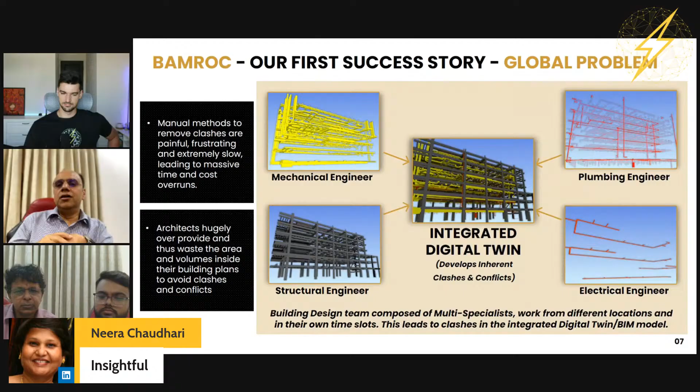Architects like me are so intimidated by this problem that we overprovide. If it's compared to a road which probably would require two lanes for the amount of traffic, just to avoid traffic jams, we provide a six lane highway. That is how we give unoptimized solutions.

So this BAMROC, the short-term solution that it gives us, removes the clashes automatically. It rides over a model with clashes. We will show that live demo. But the larger solution it will offer is that it will give architects like me the confidence to optimize the building volumes. That is the larger objective.

So moving on to the solution, BAMROC. On the left side you see a model with clashes. You run BAMROC on it, as Vimal is going to do very soon, and you have a clash-free digital twin or BIM model. We're experiencing that it's 11 times faster than current manual methods. This gives confidence to principal architects to optimize the height and volumes of buildings. Otherwise we are just over providing.

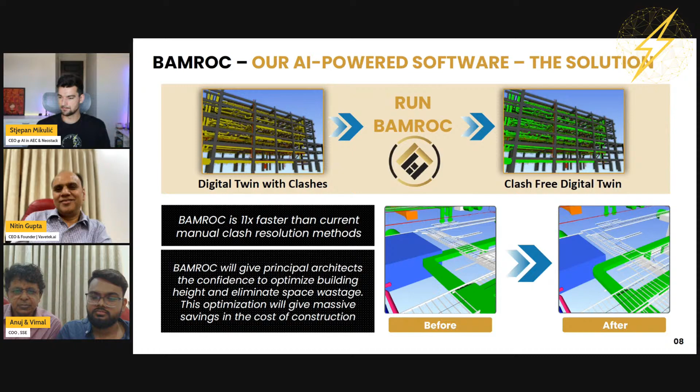Let me show, we have a question from Tony. Hi Tony, I know you're going to be joining the workshops as well, thank you for that. He's asking: how are the changes automatically implemented? There are many ways to solve a problem, i.e. change the structure or change the ducting. How is the design professional notified of the changes? Is this something you're going to cover in the demo, or do you want to answer it right now?

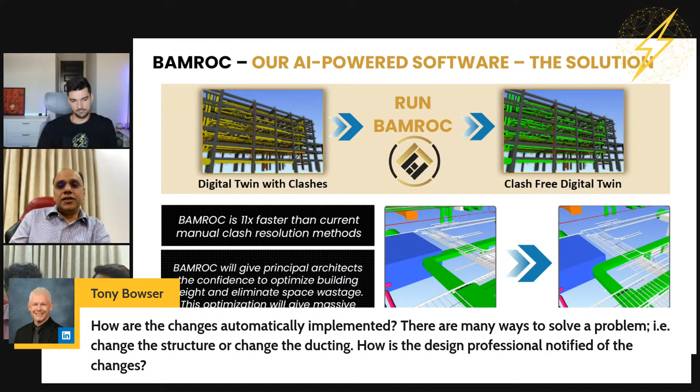Yes, Stjepan, Tony, I think this will get covered in the demo. Okay, sure, I think once the demo is over we can take the question again. Awesome, let's do that, yeah.

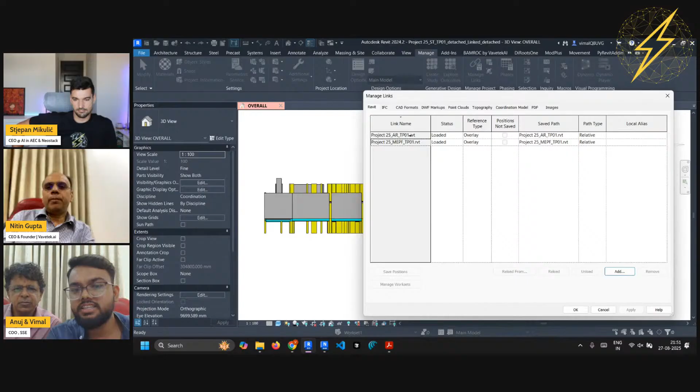So yeah, I think Vimal, now you go ahead with the demo. Great. So what I'm going to do is simply open my Revit. And here you can see I have a structure file, and in that structure file I have linked my architecture and MEP. Now just to save some time, we are using an MEP file which has all of its services in one, but we can do it with separate MEP files as well, that's perfectly all right.

Now the first step that we do is detect these clashes present in the model. For that I have already exported the model to a Navisworks format, and I'll simply open this file. So this is my MEP, and let's just check how many clashes we actually have.

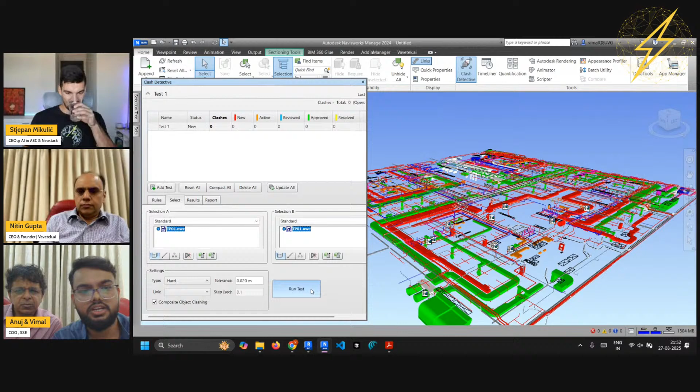Just for the sake of simplicity, I'm running a simple MEP versus MEP clash test, but you can have multiple discipline-wise clash tests, so mechanical versus electrical, electrical versus plumbing, that's perfectly all right. And I can see a lot of clashes, these red and green systems that we are seeing. Now the next step is to make a clash report out of these clashes.

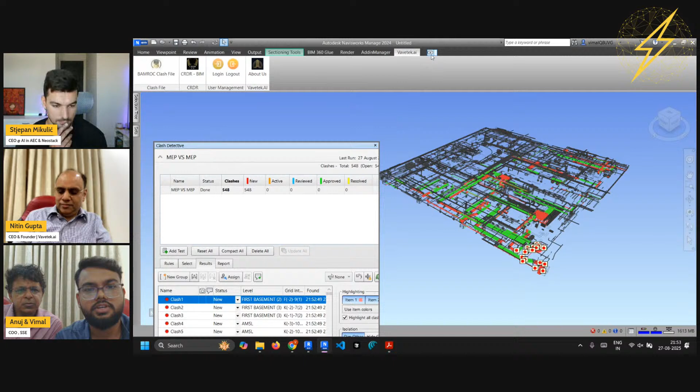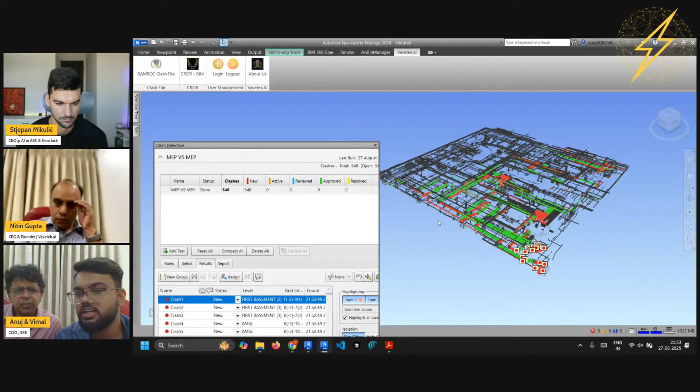In this Vavetek.AI panel, you see this BAMROC clash file. This will create the report for me. So this is a simple CSV report, you can open this in your Excel also. I'll simply replace the existing clash report, and now my clash report is generated, and there are about 548 clashes.

Now we can come back to Revit. I'll check this section box option. Now, using this section box, an engineer can resolve clashes for a portion of the building. So you can use BAMROC to resolve clashes for your single floor, for your whole tower, or maybe just in the corridor. That's also possible.

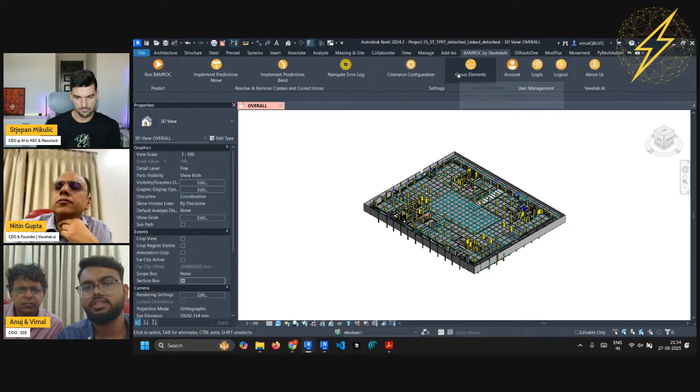Now, if we move to this BAMROC by Vavetek.AI, I have already logged in. Now I'll simply run BAMROC. So there are a few more things, but I think we'll cover these in the FAQs. For now, I'll simply run this, and then we get some guidelines and warnings, and I'll try to quickly go through these.

So the first point is that I need to include my interior architecture and structure file, so that BAMROC has the context of where my false ceiling is, where my floor slab is, where my columns are, so that it does not create new clashes with your columns or walls or anything, right?

Now, the second point is, in a lot of projects we see that there is no false ceiling, such as your basement car parkings. Also, we have been seeing in a lot of office buildings there is no false ceiling these days. So in those projects, what we recommend is you simply draw a false ceiling at whatever the minimum clear height you have decided on.

Now, the third and fourth point are regarding the boundary constraints that we have given to BAMROC, and we would want the initial model to follow these. So my MEP systems should be within my floor slab, my false ceiling, and the external boundary walls, right? So this is very important.

Now, the fifth point is really something we need to ensure, that my MEP systems are properly connected. In a lot of projects, we see that engineers simply would draw these elements, these systems, and there would be disconnections in between. Now, for the AI, it becomes difficult to assess which of these systems are multiple systems or a single system. So that is why we are saying the connectivity of the system is very important. You should not simply just align these elements, but connect them properly.

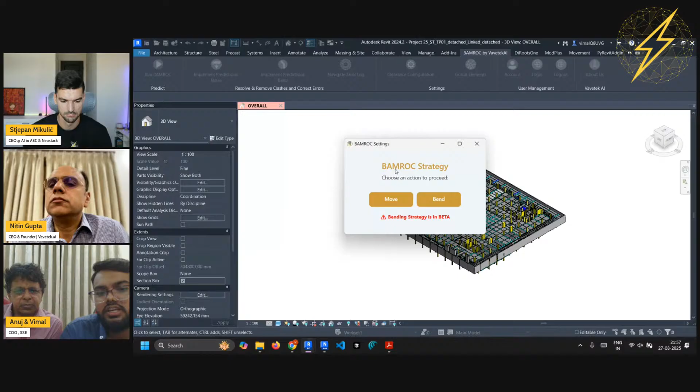Now we'll simply run this move button, and we get to choose the performance mode. Now this, we created this high setting. So if I move to here, the medium setting is probably going to resolve majority of the clashes, but we created this high setting so that the AI could think almost 10 steps ahead of the medium and resolve those more complicated cases where you might not have enough space, and it can try multiple combinations and come up with solutions which will probably resolve the remaining clashes once you have run medium.

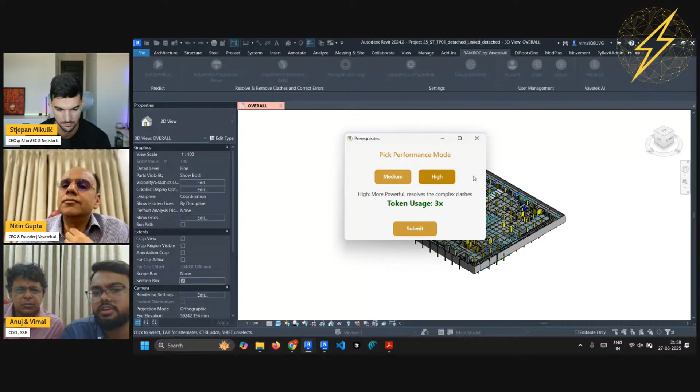For now, we'll simply run medium and submit it. And now, basically, BAMROC is collecting the mathematical and geometric information from all the models that have been linked. So I have my structure, my architecture, my MEP, so all of the mathematical and geometric data from there will get collected. And finally, we'll be giving it the clash file, which we had exported earlier from Navis.

This should be done very soon. Also, one thing to note here is all of these files are currently in my local system, but BAMROC is very much compatible with whatever cloud solution you are using for your models, whether BIM 360 or ACC or anything else.

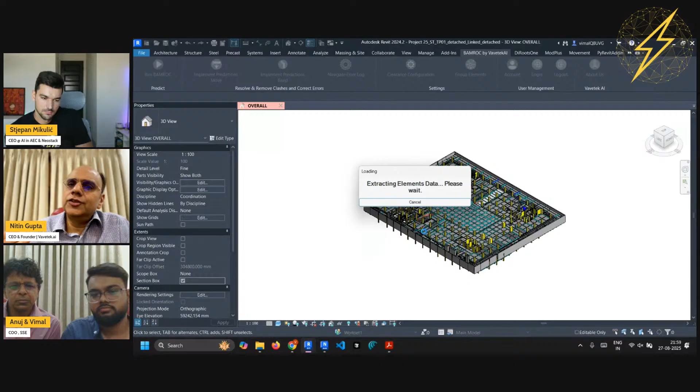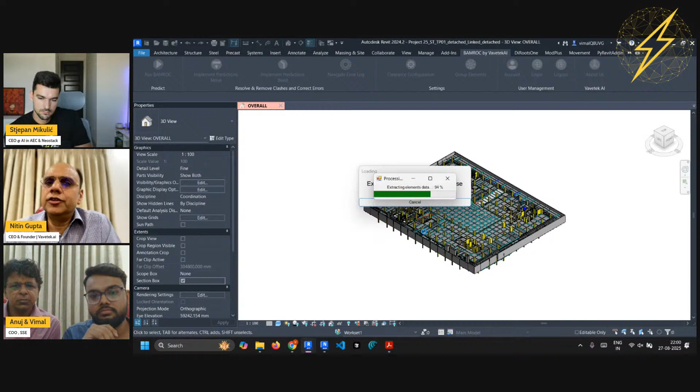So just to brief on the architecture of the software, the algorithm is sitting on the cloud. There is a Revit plugin and there is a Navis plugin to interact with the algorithm. What we are doing is we are just sending the data which is related to the clash to the cloud. It gets processed there. Then we get the predictions from the AI back from the cloud. And it's a continuous process without any break. Right, it is done.

First stage. So as I can see here, there are three Revit files. And now the time comes where I need to upload my clash file. And that's your Navisworks file, right? Yes. So this is the clash report that I had exported. Basically the only information that it contains is the element IDs for the clashing elements. And I have all of the clashes here. If I move to the bottom, 548 clashes.

So we have about 24,000 elements in this particular project. We have worked with almost 10 times larger projects also. Now there are about 331 tokens to be deducted. This is basically related to the number of clashes BAMROC is going to resolve. I'll simply process this. This will probably take some time, so I think we can take some questions as well.

Yes, let's do it immediately. Should we go back to Tony's question? I don't know if now's the time. Oh yeah, I think we can.

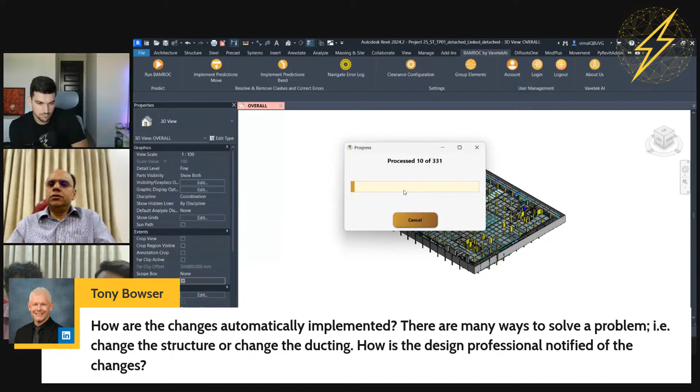So Tony, the changes are implemented. You will see when we show the demo. You do get predictions, and then at the click of a button the Revit files do get revised. The geometry gets modified. That is how the clashes are being solved, and we are not making any change to the structure. Structure is considered frozen. Even gravity pipes, the drainage pipes, are considered frozen. Changes are only happening to ducting, cable trays, supply pipes. Any element that is normally moved or bent is being acted upon.

However, the important thing is that BAMROC does not alter the design. There is no duct resizing that we are doing right now. It is only movement. We are moving the elements apart if they are overlapping, and if there is a perpendicular clash, we are just bending one of the elements. We are also combining the strategy of movement and bending, which is in beta stage right now, where we can partly move an element and then bend it at the extreme ends. So this is how the clashes are getting resolved.

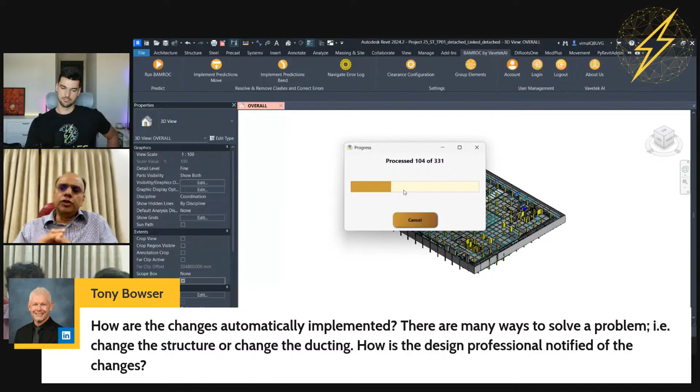And the last question: is the design professional notified of the changes? Right. We will show this in the demo, that we have created our own plugin, which is called CRDR, a clash resolution diagnosis report. So we clearly show before and after. What was the Navis before, and what is it after? You can even navigate into the before and after model and see what change has happened.

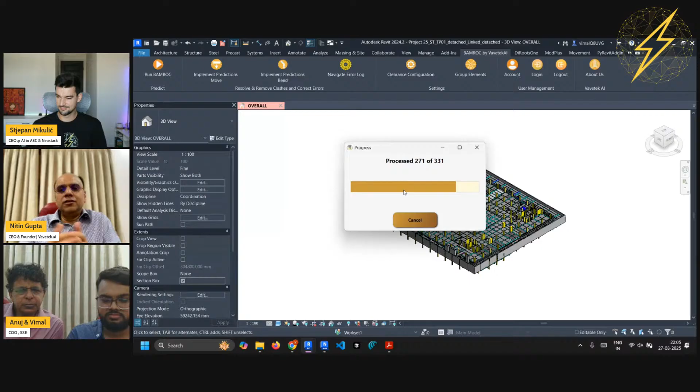Let me just add here. Thank you, Tony. We are facing this question again and again; it's a classic case of undo, redo. Can I undo? Our final aim is to let AI come up with a solution that is fully acceptable. However, it is on our agenda to develop the ability to selectively undo certain resolutions. The human being has to be the boss finally. These are AI co-pilots, they are not to ride over the human will. So that is in development, to give the final power to the engineer. Anyway, I think the predictions have come.

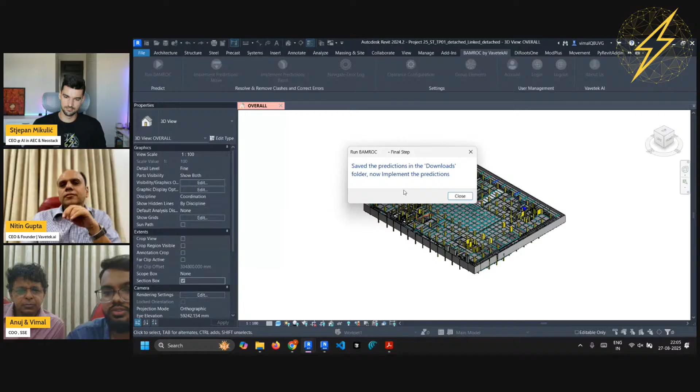Right. So Vimal, basically, the cloud processing has completed, and now I have got the predictions in my downloads folder. So I'll close this, and 293 tokens deducted. Okay. Now the final thing that we need to do is make the changes in the MEP models.

So for local files like the one I'm using right now, we can simply click yes, and it will do the job for me. So basically what is going to happen in the background is it will open these Revit files one by one. It will make the changes, it will save the modified file, and finally reload them back into the host file. Okay. This again would take some time.

So to share with you this process that you are seeing happening automatically. Initially, we were doing it manually. Vimal and his team used to open each and every file and go on implementing predictions. And they only came up with this idea that we can do this automatically. So now, as you can see on the screen, it is automatically fetching each and every Revit file separately, and implementing the relevant prediction in those files.

Okay. But I do have a question, because I think that most people watching this are either using BIM 360 or Autodesk Construction Cloud, and it said click no if you're using either one of those. So we can't do this there, right?

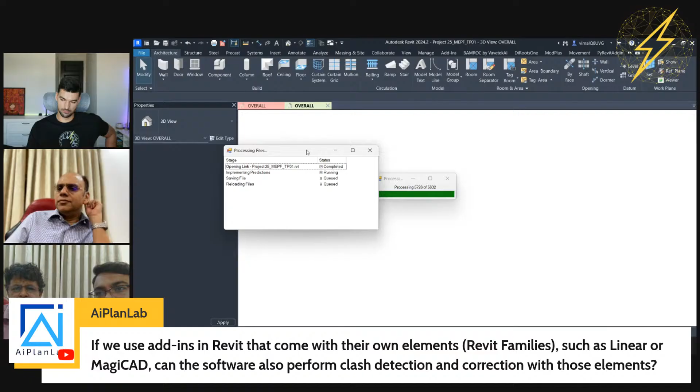says if we use add-ins in Revit that come with their own elements, such as Revit families, such as Linear or MagiCAD, can the software also perform clash detection and correction with those elements? Vimal, would you? Yes, it should be able to if the categories have been defined correctly. Right now, we have not tested BAMROC with projects where you have custom families or elements exported from other software brought back into Revit. But we'll have to see; ideally it should work.

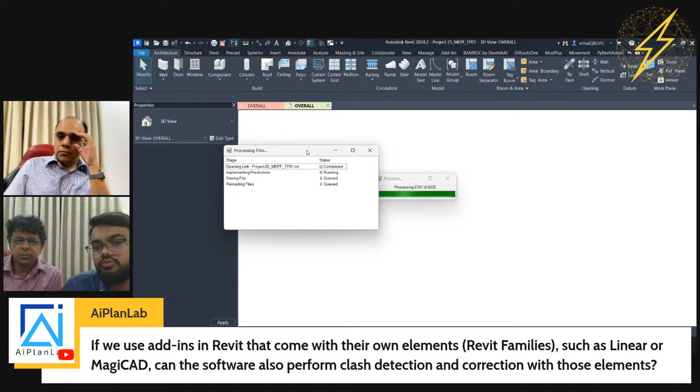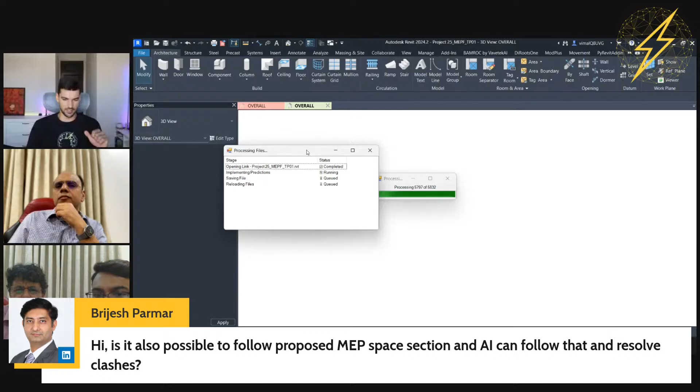Okay, awesome. Thank you. Brijesh is asking, is it also possible to follow a proposed MEP space section so AI can follow that and resolve clashes? I'm guessing he means a special part of the building. Brijesh, hi, pleasure to connect with you again. If you are talking about zoning, if you've already zoned the ducting areas and the electric cable areas, then through some methodology you can use BAMROC. It's an AI co-pilot to make sure that your services stay within those zones

and the clashes are resolved within that. If your question is about a selected section of the large model, then yes, that is also possible through the section box tool: you can select only one room of a project and resolve clashes within that room too. So both options are there.

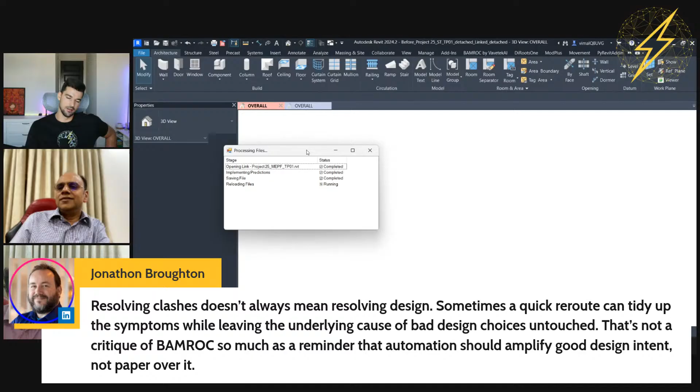Okay, thank you. We have another one, I think we have time. It's more a reflection from my good friend Jonathon from Speckle. He says that resolving clashes doesn't always mean resolving design. Sometimes a quick reroute can tidy up the symptoms while leaving the underlying cause of bad design choices untouched. That's not a critique of BAMROC so much as a reminder that automation should amplify good design intent, not paper over it. I think you mentioned something similar before, Nitin, right?

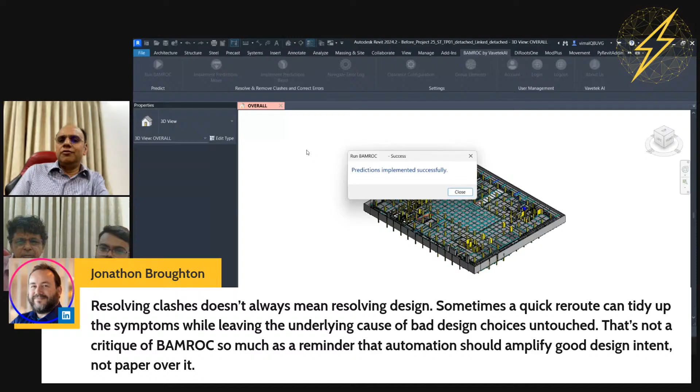So, Jonathon, as an architect and someone who's been involved in MEP coordination for more than 30 years, I am 100% in agreement with you. What we can do from our own intelligence is irreplaceable.

So BAMROC, I would say, is for 90% of the cases. There would always be those 10% where our own innovation and experience and genius is required, and BAMROC does not at all replace that. It is only to become like your assistant, to help you take care of, I would say, as we used to call in our college days, the dog work. So there is a dog work that needs to be done, and that is what BAMROC does. And you focus on the special work, I would say.

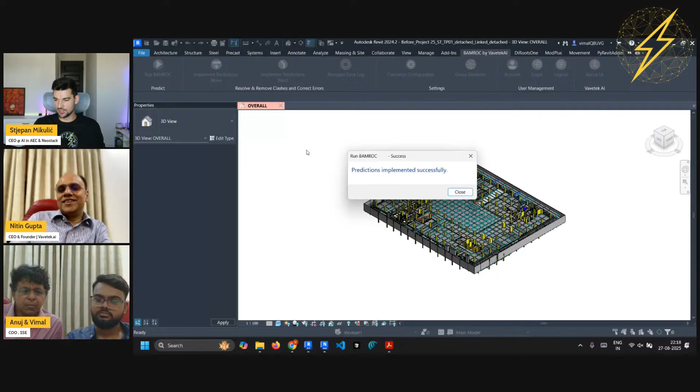Awesome. I think we should continue with the demo because I see this has been implemented now. Right. So we have the revised files now. So if I show you the links that are there, now you can see there are these before files. So these had clashes, and I'll simply unload these. And then I have these processed ones. So even if I had multiple files, this would be saved as multiple mechanical, electrical, plumbing files.

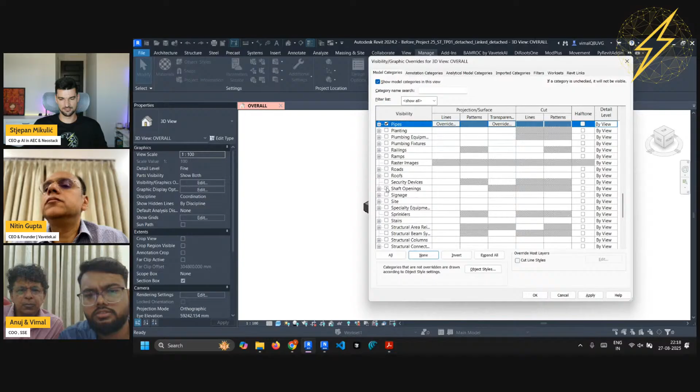Now what I'm going to simply do is I'm going to make a Navisworks export, and I'll select my categories for which I want. So I'll select my cable trays, my ducts. Let me also include mechanical equipment, then pipe fittings, okay, and sprinklers. Okay. Let me export it.

Okay, so now you open the before model and you're exporting that, right? One with the clashes. So now I'm exporting the after model. So this is basically the after resolved model. Right. So okay, are you sure? Because it says there before project 25 detached in the file name. Okay, maybe it's just me. So that is my structure file. No changes have been done in that. Okay, my bad.

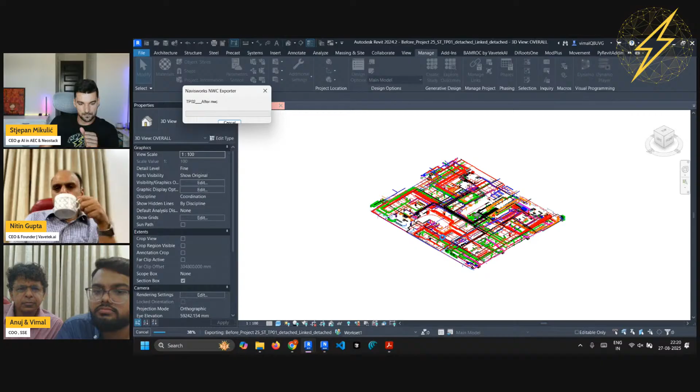So Vimal is now primarily checking in Navis what is the status of the clashes. So this will probably take a couple of more minutes. Do you always get like a new file, or can you just adjust the existing file, or you made it on purpose that you get a new file? So this is on purpose only, so that I can retain the data in the original files. Mm-hmm. Okay, so you can check everything and so on. So okay, I get it.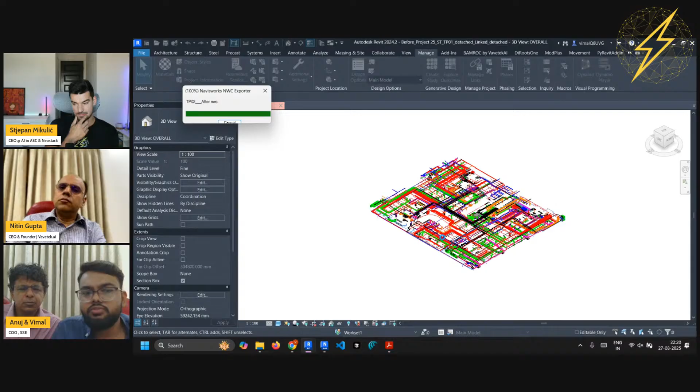But is it still connected to the central model, so you can still synchronize it? You can do that, but I would not suggest that. You have to replace it, I believe. So you need to delete the old design and paste in the new one. Right. So that is why I'm saying this. What we suggest is you simply run BAMROC and use the automatic implementation for the local files that you have downloaded from BIM 360 or ACC.

And once you have validated the end results, you simply use the same prediction, implement it directly on the BIM 360 or ACC module. So after validation, I load these mechanical, electrical, plumbing files from my ACC. I make the changes with the implement prediction button, and then I sync it to the cloud. So that way it works. So you work locally, meaning that even when you work in ACC, you would download the files, fix them, so to speak, and then upload again. So that is one way. That is what I was saying.

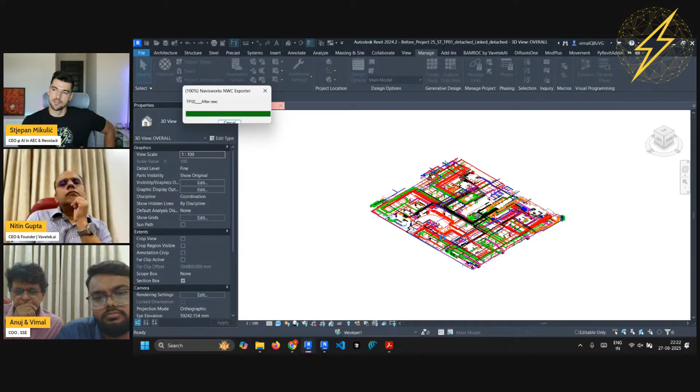The other way is you can implement the predictions directly on the ACC only. Just that you have to load the models manually and run the implement prediction button. Okay. But what happens? The question is more about these models, because I understand how it works, but if it creates new models that are like before and after, and you have a bunch of tags, a bunch of drawings, a bunch of setup in the old model, does that also get copied to the new model, or is it only geometrical changes that get moved?

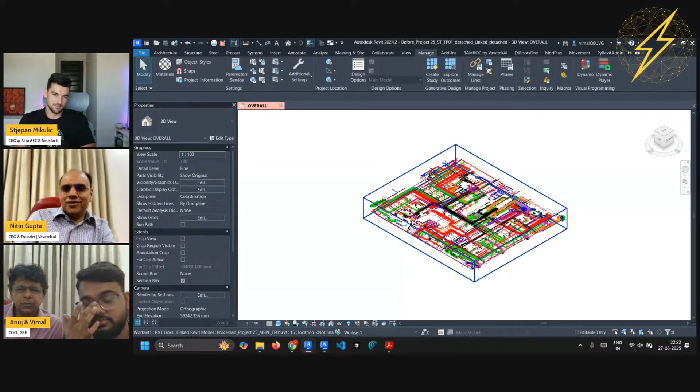So I think there's a confusion. Vimal, you are creating a before and after of Navis, right? I think so. Stjepan, Revit gets updated. Just revised. So okay, yeah. Thank you for clarifying, because I was like, okay, so it's only before and after of Navis that you're creating. That's right. And that's why he renamed the after Navis file as TP02, because the initial one was TP01. So it is only the Navis which is getting revised. My bad, we are revising the Revit files also, just so that I can save the before models. I think now we can check the final files. So this was the one. Let me open this.

Okay, this is the same file. Okay, great. I have everything in here. I can now run it. So what are you doing now?

So now I have created this final Navis file, which basically shows me that my clash count has reduced to 134, down from 548 that was initially, right? So that has happened. Now the next step is to validate these changes one by one, right? So I can do that.

So I think Vimal, you need to take a pause here, because this is now a moment. So you need to highlight. Initially, the model had how many? 548. Okay, so before we ran BAMROC, in Revit, the number of clashes were 548, and now after running BAMROC, the number of clashes has got reduced to 134.

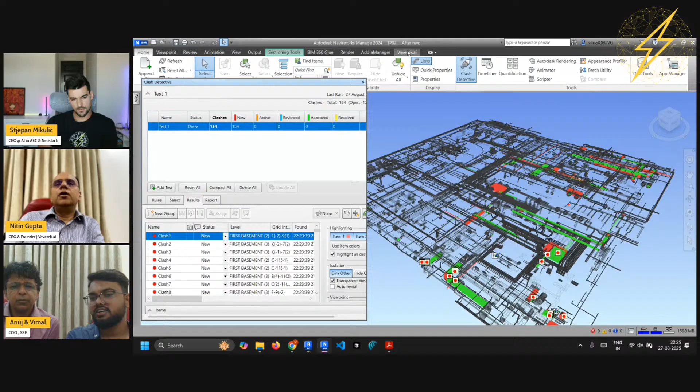I think we should also highlight there will always be certain clashes that we have tried to avoid resolving. The approved kinds. Yes, so that is another aspect to the whole thing, that out of this 134, there are many clashes of the approved category. So approved clashes, BAMROC does not work on them, and it will just let them be as such. So that is an analysis that needs to be done later, that out of this 134, are there any genuine hard clashes remaining, or is it mostly the approved ones.

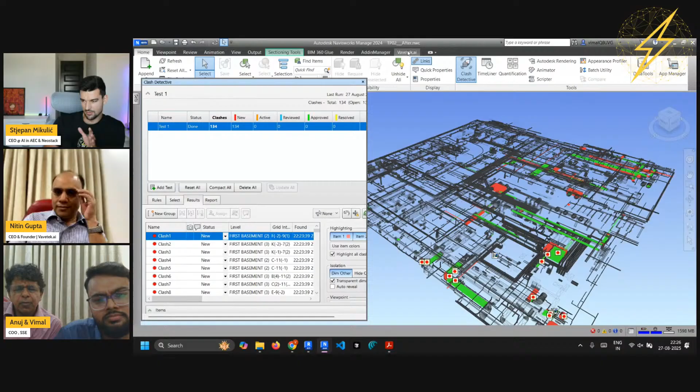Okay, I just want to do some quick calculation here. Bear with me. So we had 548 clashes, and now it's 134, which means that 414, if my math is correct, BAMROC solved itself. And if we take that each of those would take, to do it manually, let's say 5 minutes.

Some of them are like a minute, but some of them are longer because you need to call people, you need to align. So let's say it's 5 minutes each. This is 2070 minutes. In hours, this comes out to 34 and a half hours saved. So you basically saved a week of work on this. Yes, you are absolutely right. I think your maths is absolutely correct.

So that is what we are saying, that we are 11 times faster, in a cumulative manner, and that is fundamentally where the return on investment is coming from for the software. Wow.

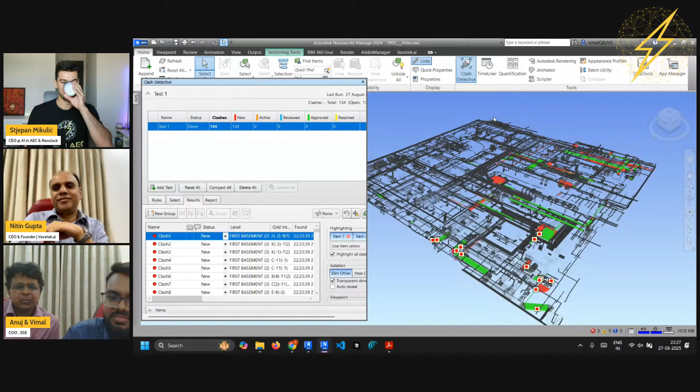Okay, go ahead, Vimal. I think there's a lot of MEP engineers that are very happy. We have a lot of questions that we're going to cover, but yeah, please go on.

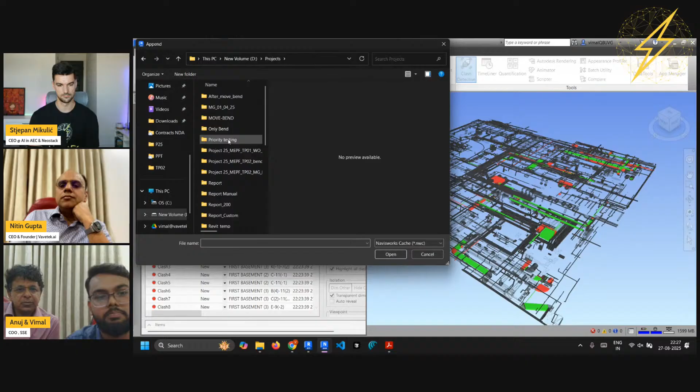Right. So now the next step is to validate these clash resolutions. I want to see how these clashes got resolved. So what I'm going to do is simply append my before model, the TP01. So I have both the before and after models in Navis.

And what I'm doing here is creating two clash tests. So I'll name this one TP01. Let me also update this, and I'll run this. And I'll have this TP02, so my after model has TP02. This is where I got confused, right? So you have before and after in Navis, but Revit is getting updated in real time. Right. Yes. Okay, my bad.

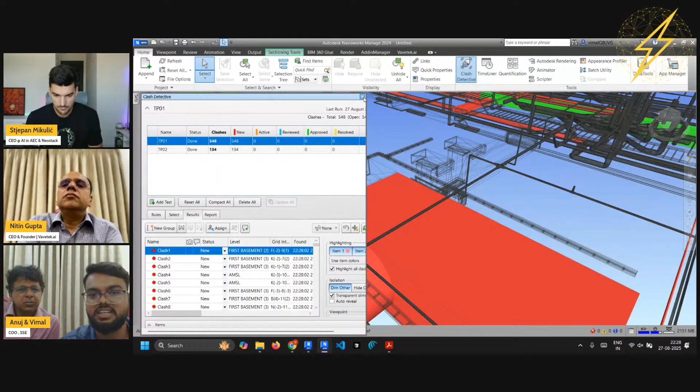Great. So now that I have added these clash tests, I can go here and click this CRDR BIM button. This is the Clash Resolution Diagnostic Report, and this will create a visual report for me. It will create images from the before model to see how the clash was earlier, and in the after model for how it got resolved.

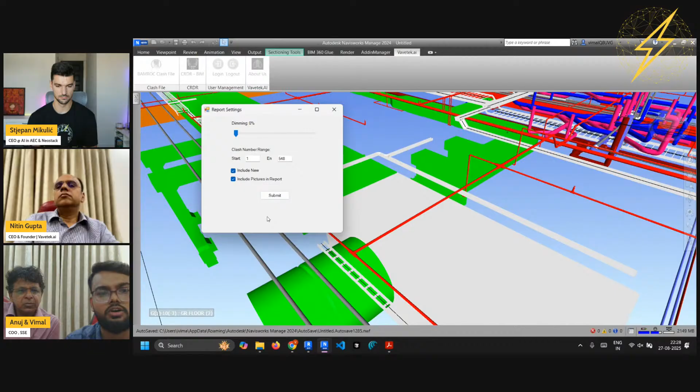So I have selected a location for the report. We'll create the report for, let's say, all the clashes, and I'll submit it. This will probably take some time. Now, what is happening in the background is it is taking pictures of the clashes from the before model and how they got resolved from the after model.

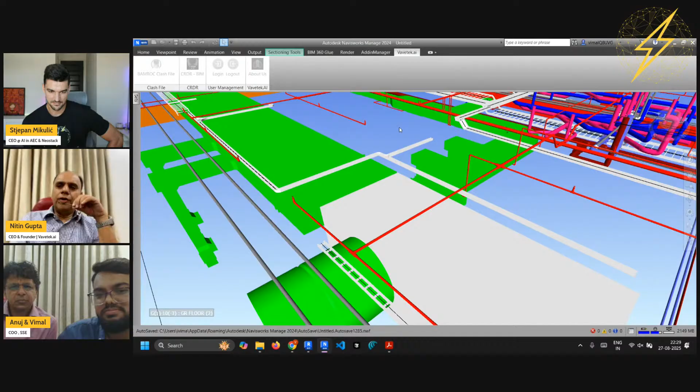So this will probably take a few minutes. I think we can take a question or two. This is now creating that report primarily. So we can take some questions. Yes, let's take some questions.

We have a bunch of questions. We also have some jokes from people in the comments, which is nice. One says, today I learned Stjepan works a short week when I said 34.5 hours. I can assure you I don't typically work a short week, but that's a different topic, just putting it in perspective. I agree it's a great tool, as Sakib says as well.

All right, let's go back to some more serious questions. Mahmoud is saying, thank you for the presentation. For example, when we encounter a clash between a duct, other elements, and the false ceiling, one possible solution is to resize the duct by increasing the width and reducing the height. In such cases, does the BAMROC AI respect the required aspect ratio of the ducts? Additionally, how does it handle other design verifications for the system, such as friction loss? Okay, very technical.

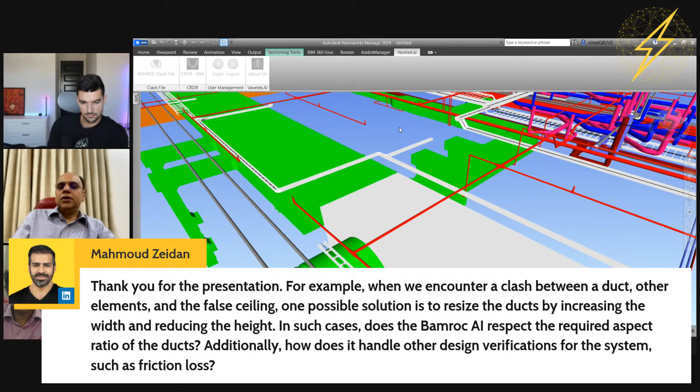Mahmoud, at this moment we are not resizing the ducts. That is something we are still considering and reconsidering as a strategy. Though I know as an architect we do deploy that strategy a lot, and it's a very effective one, but at the moment BAMROC is not trained for that. The AI is not trained to resize the ducts.

What I keep saying again and again is that the AI right now is trained only to take geometric decisions, very minimalist ones. It just moves the element enough that the clash is removed, and on top of that there's a feature where you can specify the minimum gap you want, and it will respect that, but no more. So effectively there's hardly any change to the fundamental design. What we're researching is that BAMROC does less changes than what modelers do manually to a clash in a model. It's very minimal changes being done. The intent is not to disturb the design of the engineer, just do minimal geometric changes.

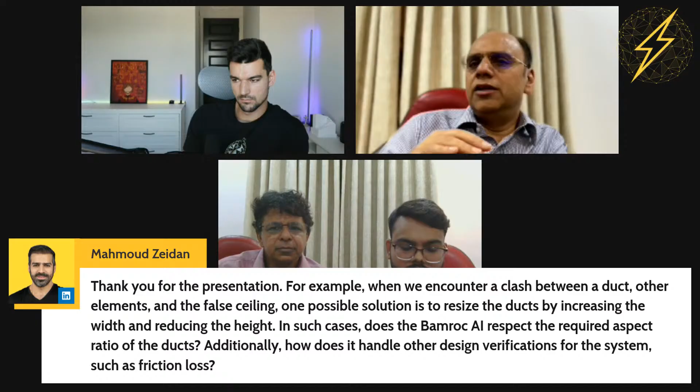What about the other design verifications for the system, such as friction loss? Typically, friction loss, if the original design is correct and we do not change the original design much, then we need not worry about friction loss and such design related problems. Especially with bending, which is in the beta stage right now, we are trying to avoid multiple bends. So if there are three clashes in a row, we would just partly move the element up and bend at the extreme ends. Being very well aware of the problems related to design changes, right now our intent is not to do any design changes, just minimum geometry changes.

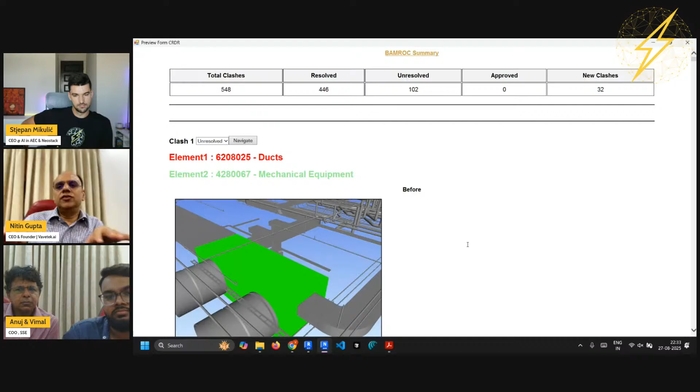Okay, thank you. Do you want to continue, or take some more questions? I see you have a report ready, Vimal. Right, right, let's go over this.

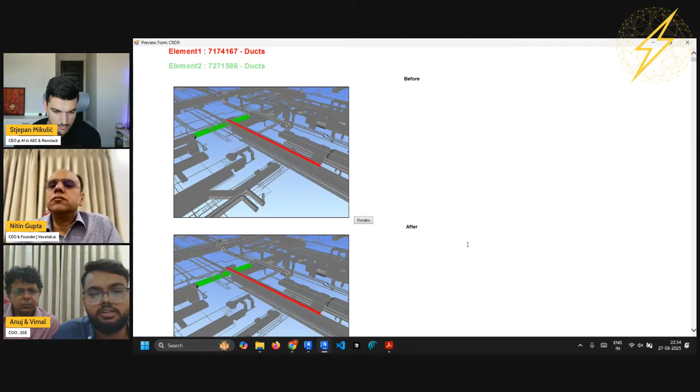This tool that we've developed, CRDR, created a visual report for me. I can see the before and after. I can see there are still some unresolved clashes, probably because it couldn't find enough space to move the elements. So this would be one of those cases where it's already unresolved, meaning it has failed. But let me show you one of the cases where it has resolved the clash.

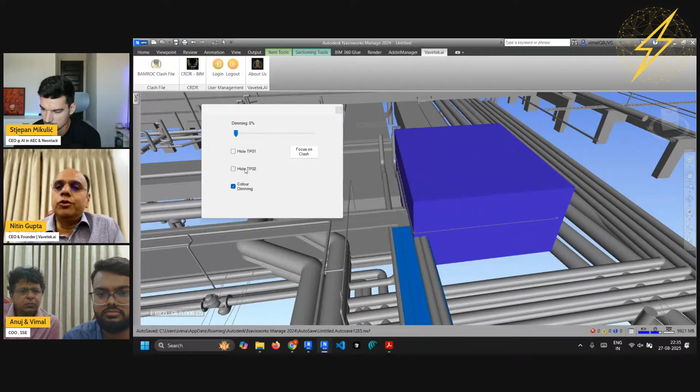This reporting tool itself is very interesting, we've developed it ourselves. You are able to navigate into the Navis model through this tool. Right now it's showing both the before and after model overlapped on one another. If I hide my after model, which is my TP02, I can see this cable tray clashing with the mechanical equipment. Now, what has happened to it? If I switch, I can see this clash is now resolved.

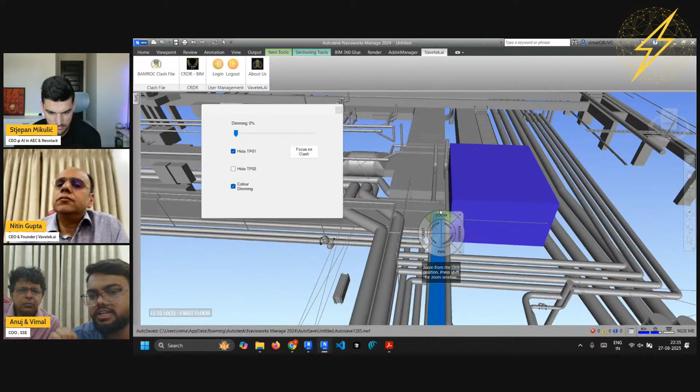Now the cable tray has been moved to the left side, just enough to resolve the clash, not enough that it makes a design change or routing change. It simply resolves the clash, and both the pipe and the cable tray come out of the mechanical box okay.

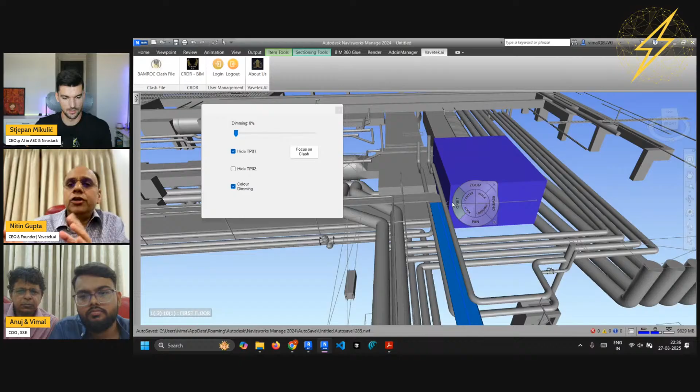Does it respect any minimal distances you want to put in, or does it go down to zero millimeters? Very interesting question. We have created a feature within BAMROC where the modeler can specify the minimum distance, between a cable tray and a pipe, or between a duct and a cable tray, vertically and horizontally separately. The cable tray requires some clearance for maintenance, so we felt we should leave that choice to the BIM coordinator and the MEP coordinator. But there is a possibility for that, total flexibility, you can specify 13.5 also.

But of course, the bigger you specify, the fewer clashes will probably get resolved, right? Yes, that is absolutely a limitation. So we'll show you how that works too.

Also, we can see there are some more clashes that were present in my before model. If we switch back again, I can see those are resolved too. So it has basically taken note of all the clashes present and is trying to provide a holistic solution to all of these clashes.

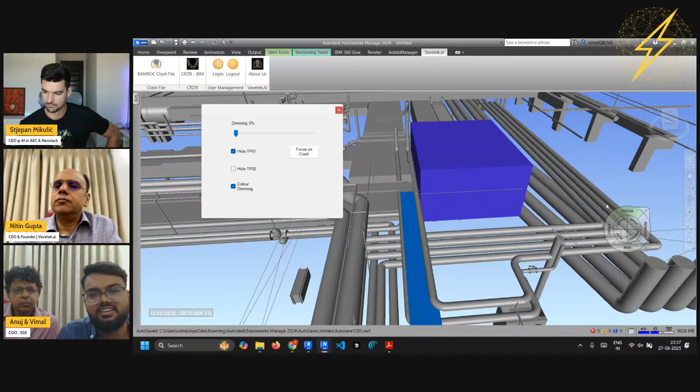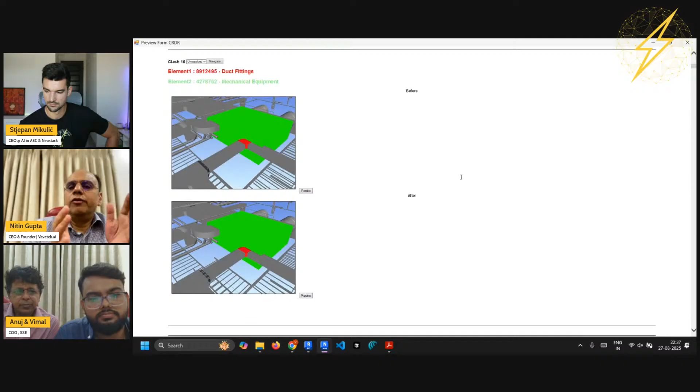I think that is one difference between the way I would work without BAMROC and the way BAMROC works. I would go from one zone to another. However, BAMROC is able to take decisions for the entire model because it has simulated it mathematically. The AI has simulated it in its own mind and is able to consider everything from one corner to another. So that is a bit of a difference, a very holistic approach is being followed.

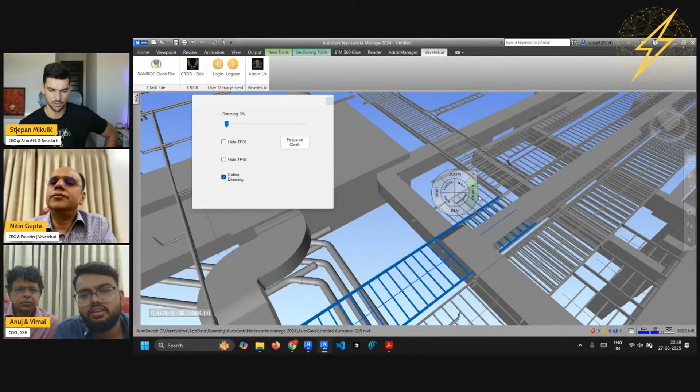Yes, go on, we have more questions but we can take them later. Do you want to show something else after this report and comparisons? So basically this report is almost done, and I can see there were clashes earlier and it's resolved now. All of these cable trays were clashing earlier, and all of these are resolved now.

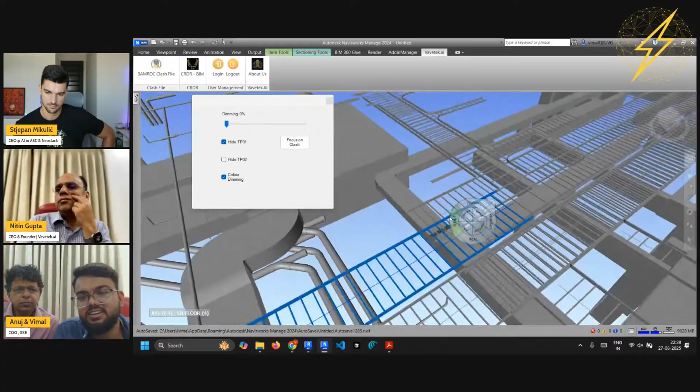Similarly, we can keep going over these, I think primarily it will be similar examples. The whole beauty of this reporting is that one is able to judge whether an unresolved clash was actually an approved clash, and you can keep marking that in the approved clash category.

And finally come up with whatever genuine number of hard clashes remain, and then you can rerun it. It is very much possible, even if 100 clashes are left, the whole BAMROC movement can be rerun on it, and it will resolve more clashes, because for the AI the situation has become easier now. We do find that multiple times we run it, it keeps resolving more clashes.

Also, if you remember, Vimal showed you a feature of medium or high. On the high command, it runs at 10 times the capacity. So once you are left with fewer clashes, you can run it on high power mode, and the AI is in a more intensive loop, thinking 6 into 6, 36 times. It consumes more cloud space at that time, but it is able to resolve more complicated clashes.

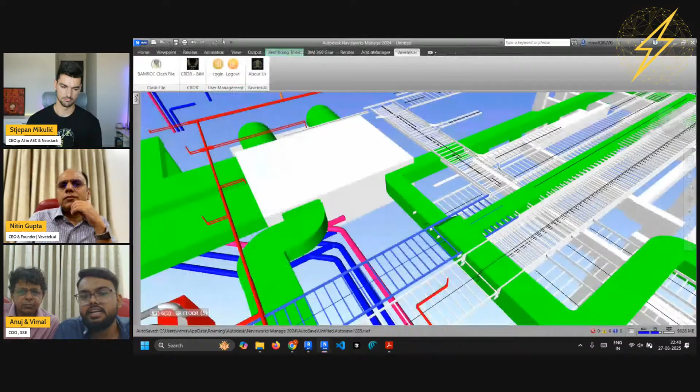Vimal, you want to go ahead with something? So basically, once I have validated these clashes, I can simply close this, and it will create a final report on my system. We are almost done. I think once you've created the CRDR report, your assignment is almost over. Now it is more for the MEP coordinator to go ahead and validate these clashes.

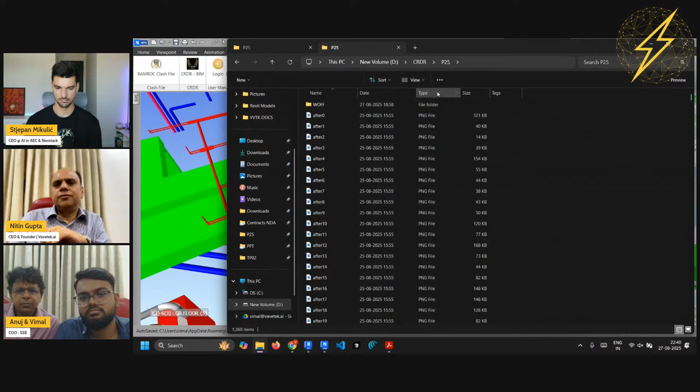I think there are some things we should admit and highlight here, that during this process sometimes there are errors. There is no software in the world which does not have errors. We do see errors coming in, sometimes there are deletions when the movements happen. So we've created a tool for that, and Vimal would like to show that. Right, we can do that.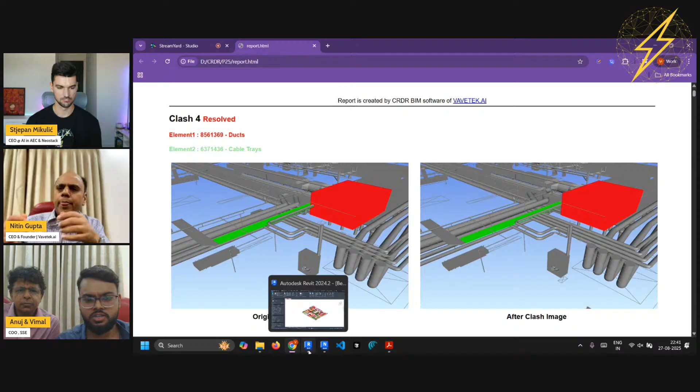So basically, these errors we can check. All I need to do is open this processed file. So I'll simply unload it and let me open it. So it's actually here, so maybe this is the one.

So what I'm doing is opening my revised Revit file and navigating these clashes. While the changes were being made, there was an error log being created, and now I will navigate them using this navigate error log. A lot of these errors will be automatically resolved. We'll see that. Yes, we have created within the software a process of automatically correcting these errors, which you are seeing on the screen.

This is now an error log. The red ones are the ones which have not got automatically corrected. However, the green ones are the ones which have got automatically corrected.

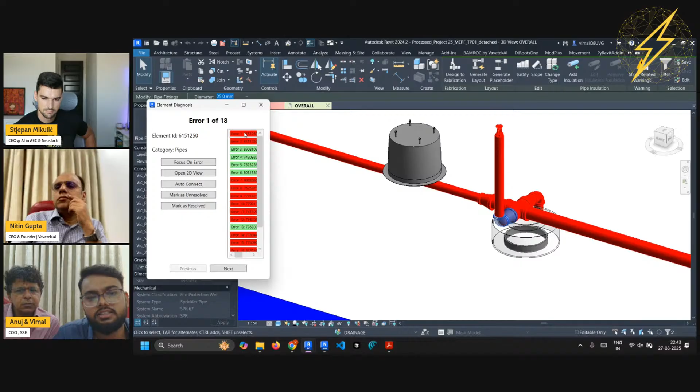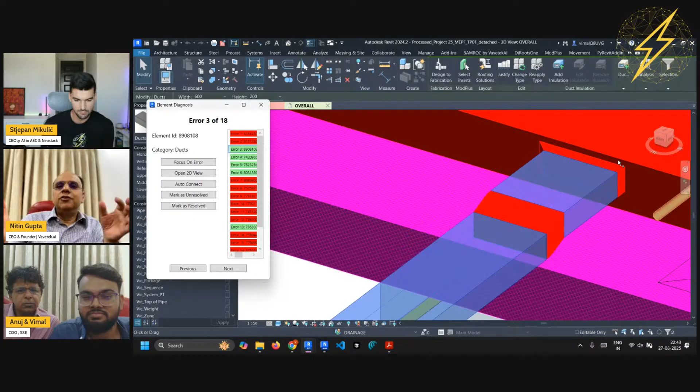I would like to highlight here that some of these red ones are disconnections that BAMROC thought might not be required. So they are still logged, but as you can see in this particular one, it's not really an error. This is okay, but we are logging this so that the user can confirm it. The idea is that the MEP coordinator, the BIM manager should not get any surprises, because everything is happening so fast that there would always be a doubt and suspicion as to whether something went wrong.

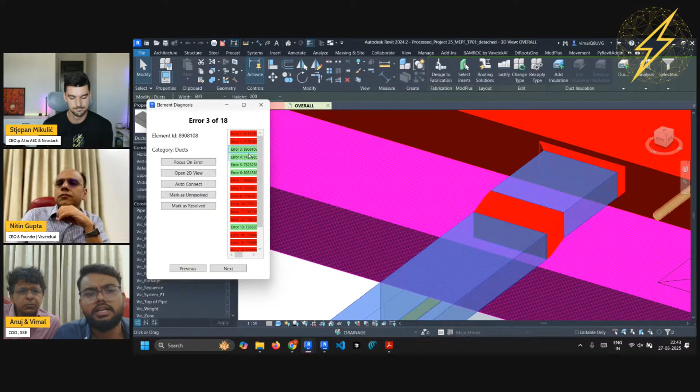So I think it is better to transparently show wherever there is a possibility that something needs a look. In this particular case, there was a disconnection between these blue highlighted duct elements, and then it got automatically corrected using this middle duct fitting and duct getting created. So it is highlighted as green here. Similarly, there are these few errors that have happened.

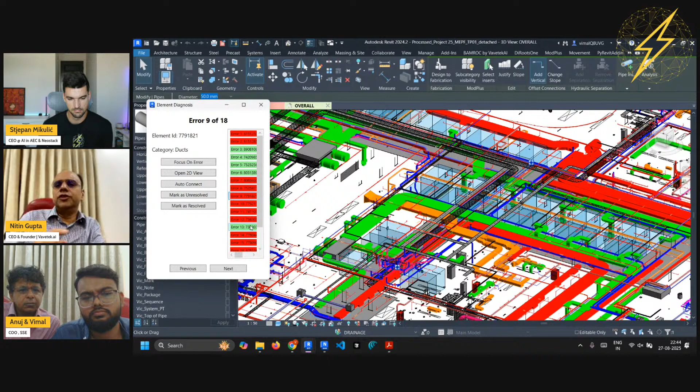I think for a professional BIM specialist, it won't take much long to correct these. These errors do need to be fully corrected before you rerun. So if you want to run again, you need to go to these errors, just make sure that they are all green and to your satisfaction, and then rerun.

Okay, so if I understand you correctly, your software fixed 414 issues. Of course, mistakes happen, as you said, so it's maybe important to quickly go through, analyze, see, but most of them are, let's say, fixed. But then there were 18 errors that the software, BAMROC, also generated. And this report gets generated automatically as well, right?

Right, yes. So you're saying that before running again, the user, the BIM specialist, BIM coordinator, whoever it is, needs to open this and fix these errors before running again. That's right, absolutely.

Okay, cool. Is this it? I mean, this is a lot. Yes, this is amazing. This is it as far as the software demo is concerned. Okay, amazing, thank you so much, Vimal, for showing this. Thank you, guys. I know it's late at night. I want to take some questions now.

We have a bunch of questions from the audience, and I want to start with Zoltan's question about data security. Are the uploaded plans, models stored or used for training purposes? Do you have any data security certifications that would allow us to use the software on projects where confidentiality is required?

Yeah, so data security is fundamental to BAMROC. I mean, first thing is no project data, no client data is stored on AI processing servers. BAMROC just collects the geometric data and sends it to the cloud server for AI processing. We are not using project data or client data for training the AI model. So data security is fundamental to BAMROC. And when it comes to transmission of data to the AI processing server, secured protocols are being used.

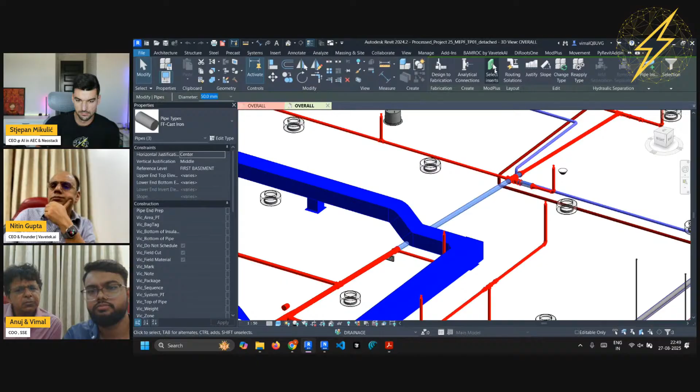Let me also show you that. So if I go here, this clearance configuration is there, and I can configure what kind of maintenance gap I want to give for my ducts, for my pipes, for my cable trays, for my mechanical equipment. So I might want to give different kinds of gaps for different kinds of systems. So that is possible. And similarly for the bend angles also, we have that for the bending algorithm.

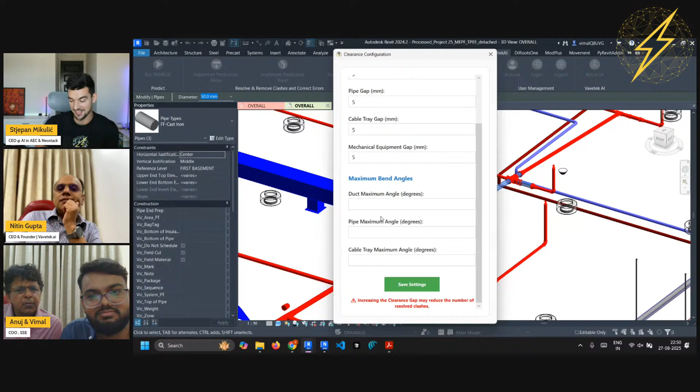I think I can speak for everybody here and say that you thought about a lot of stuff. I think you have an amazing tool here. Okay, let's continue with the questions. We have 10 minutes more. Briesh is asking, is it possible to see resolved clashes in a clash report rather than to open them one by one? But yes, we saw the report already, right?

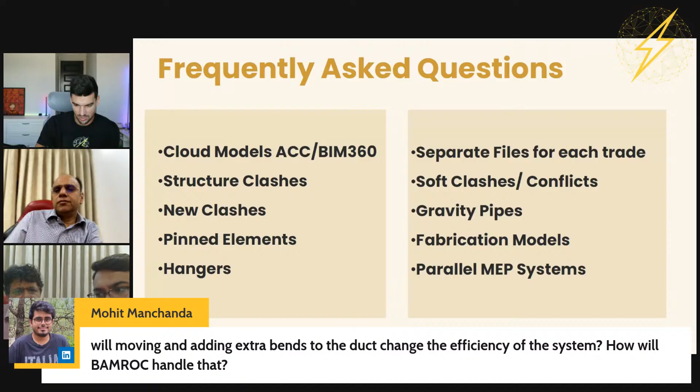Yeah, right. Okay. Mohit is asking here, will moving and adding extra bends to the duct change the efficiency of the system? How will BAMROC handle that? So Mohit, as far as the movement is concerned, it is absolutely the minimum, as we explained, just with the minimum gap that you are going to specify. So there is hardly any change in the overall geometry, I would say. So efficiency does not get hampered.

When it comes to bends, we are testing it. The idea is to give minimum bends. If there is a duct which is clashing with supply pipes at multiple locations, we will not keep hopping over it again and again. Instead, the algorithm would be able to take one combined decision to just lift the part of the duct and bend it at two ends. So with such strategies, one is able to do very minimal changes to the model.

Okay, amazing. And Mahmoud is asking, what happens if some of the models are in IFC format? For example, when the architectural or structural models are created in software other than Revit. So for now, we have not really made it compatible with IFC. But that is one of the things we are going to do in the future. We will make it compatible for IFC and other software if there is a large interest in that. Okay, awesome. Thank you so much.

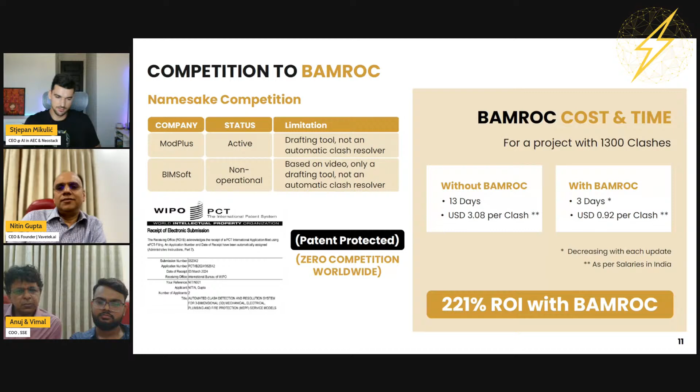So Stjepan, as I explained in the beginning, our mission or vision is to create AI co-pilots which can audit the design of a building engineer and offer optimization. So that is the mission. BAMROC, I would say, is a problem that we identified and we are trying to solve. We have been reasonably successful there.

However, in future, the roadmap is that Anuj, our chief operating officer, who is also a champion software engineer himself, has taken the ownership of the next product, which is going to be an AI co-pilot for the structural designer. So we intend to create a group of tools which can be applied to the various components of the structure of the building. So let's say a separate tool for foundation, separate tool for columns, separate tools for the beam design, but with the intent to audit in terms of the consumption of the material, audit the design, and then to be able to optimize it. That is the basic intent.

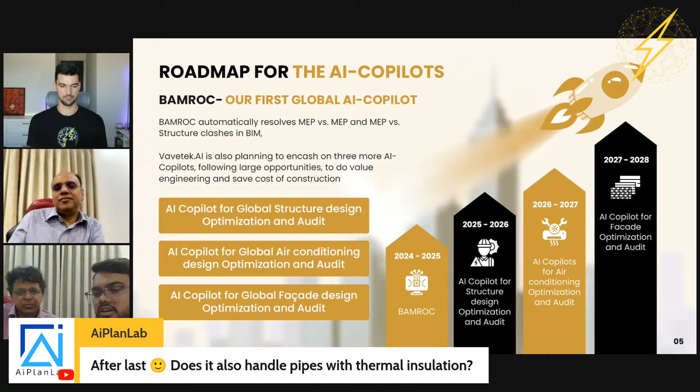Yes. Okay, well let's add this one in the last minute. Does it also handle pipes with thermal insulation? Vimal, would you? So we are right now not considering insulations, since insulation clashes are more so categorized as soft clashes. But we are giving an option where you can define the maintenance gap, and that maintenance gap should include your insulation thickness, right? So using that, those insulation clashes will get resolved. Okay, thank you so much.

And the last question from my end is, what are you the proudest of in your journey? I mean, Nitin, you shared a lot. I really commend you as well. Don't get me wrong, but a lot of people your age would just go and relax, and not invest in a new venture. I see it happening all around. So I really think it's an amazing thing. You started this and you really want to solve this. So I think that speaks a lot. So yeah.

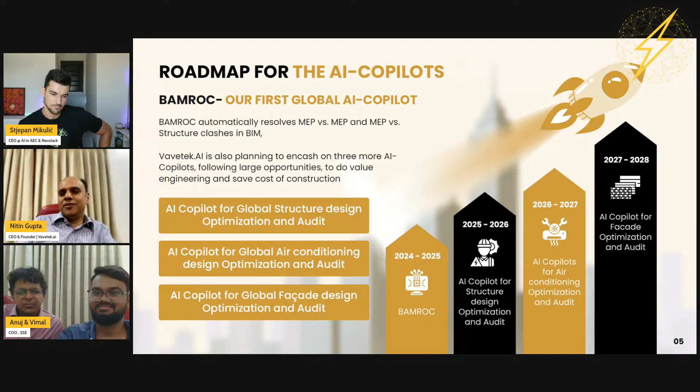Yeah, so I think, Stjepan, this is something that I would say we are most proud of. That is our entire team. That is the real force behind our success today, wherever we are. There are two engineers sitting right behind us, who are not being seen in the call, and they are there just for our support. In case Vimal's laptop would have crashed, they would have been there as a backup. So Harsh and Dipanshu are there. You can say hi. Hi, everyone. Oh, hi guys! Wow, we have more people. Amazing. Yeah, so that's our strength and pride.

It's me, Anuj. Anuj is my younger cousin, and Anjana, my wife, and then Deepak is there. Deepak is probably on the call also. He's in Dallas, so he's our guru as far as the entrepreneurship world is concerned. And then Vimal, Harsh, and Sagar is our marketing wizard. He's the one making all the strategies for the social media campaigns to reach out. Ojasvi and Harsh have been the coders and the AI engineers. Then Tanmay is our tech advisor on the AI, and Divyansh has recently joined the team, and he's taken over the entire system bending, which is going to be the most advanced tool of BAMROC.

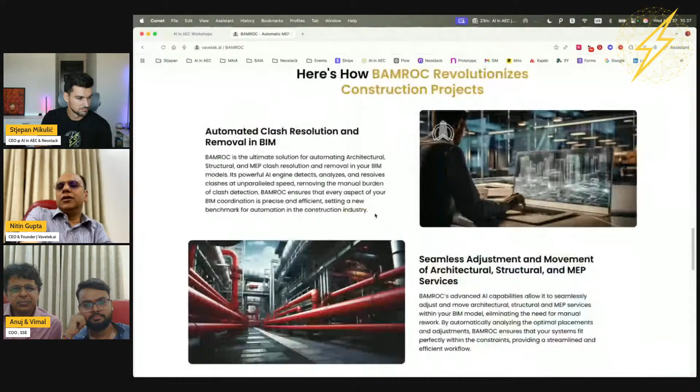And I see that you have a lot of other plans here, but this is upcoming, right? Yes, this is upcoming. So as we mentioned in our roadmap, right now it's the AI Copilot for the structure designer, and then making BAMROC a platform for clash management, starting right from improving the model health with respect to the MEP clashes, and taking it right up to the clash resolution diagnosis report. End to end, we are working on the entire platform.